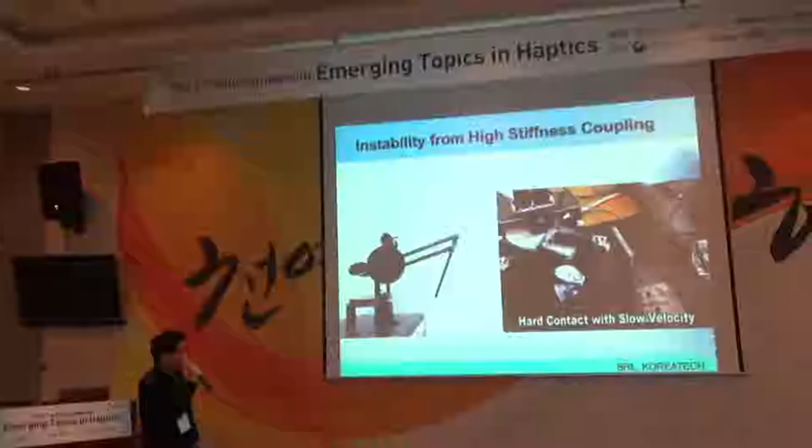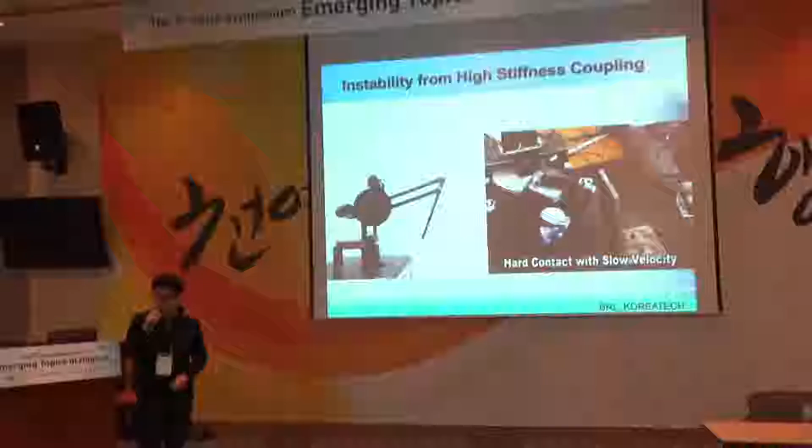So let me start with some of the control topics that I have been doing so far. At the early stage of telerobotics and control, especially from the robotics point of view, a lot of people were actually interested in control, especially stability.

So where does this instability come from? Actually, this instability problem comes from the high stiffness haptic coupling between master and virtual environment, and also master and slave. So typically, I was interested in these problems. Let me show you some video clips.

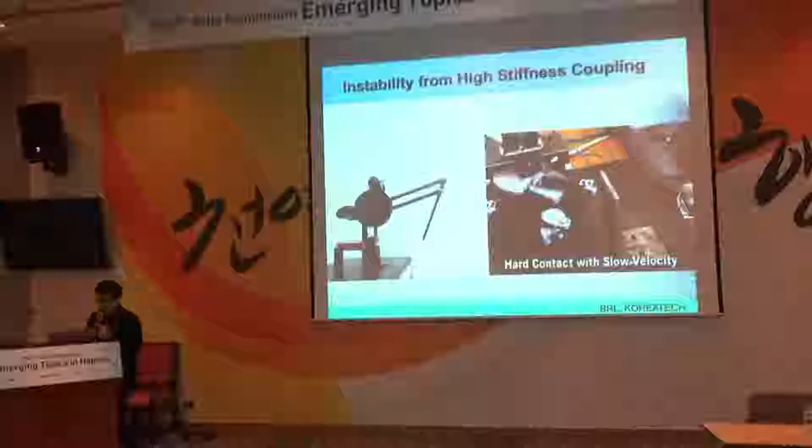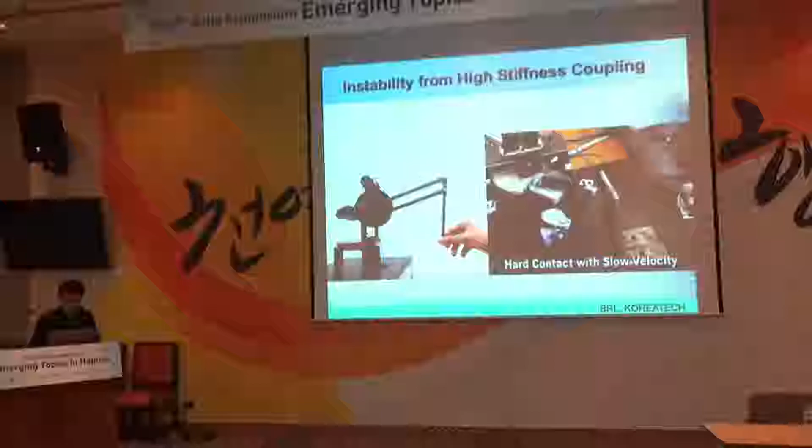Okay, now, whenever you increase the stiffness of the virtual environment, especially for phantom, if you increase the stiffness about 2 or 3 kilonewtons per meter, then you can hear such a strange sound. Is it familiar?

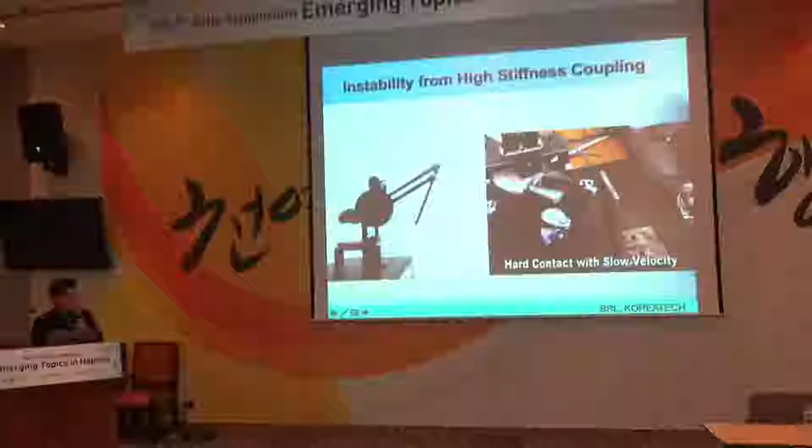And also, if you increase the coupling stiffness between master and slave, then even without time delay, the system easily goes unstable.

So at the beginning of the early stage of telerobotics and control, a lot of people were actually working to try to solve this problem, and I was one of them trying to solve this problem.

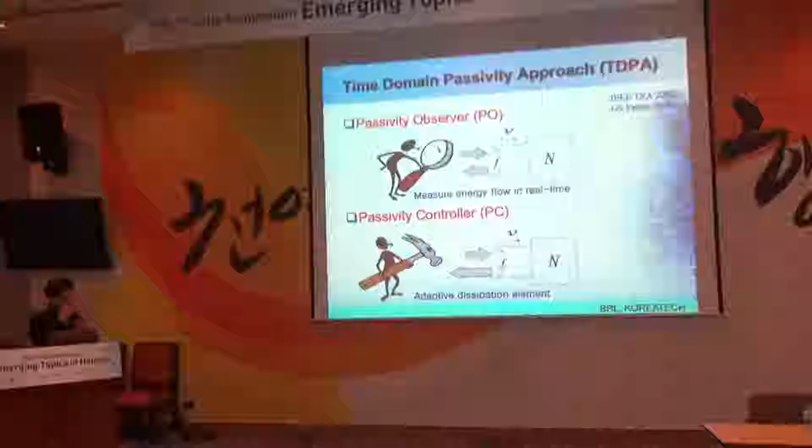One of my major scientific contributions in this area is proposing a new concept of control strategy, namely the time-domain passivity control approach. It has 2 components: the passivity observer, which monitors energy flow in real time, and the passivity controller, which dissipates the extra amount of energy produced from the system that could potentially make the system unstable.

So that was a very simple concept, but very effectively working, in the sense that it injects an adaptive amount of damping whenever necessary. This controller has been known as one of the least conservative controllers in this area.

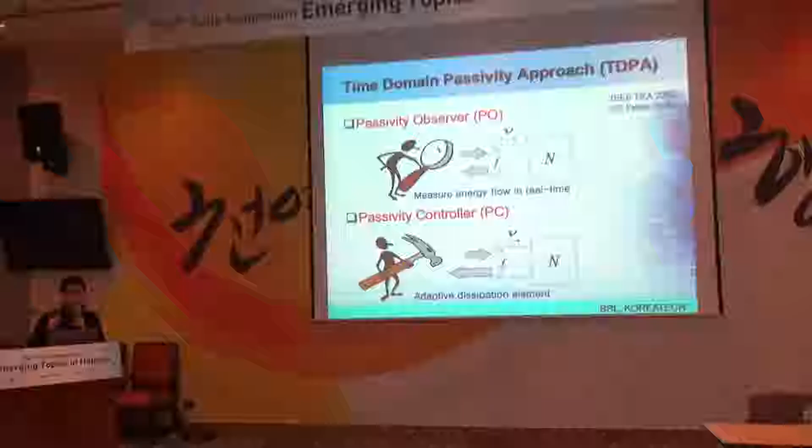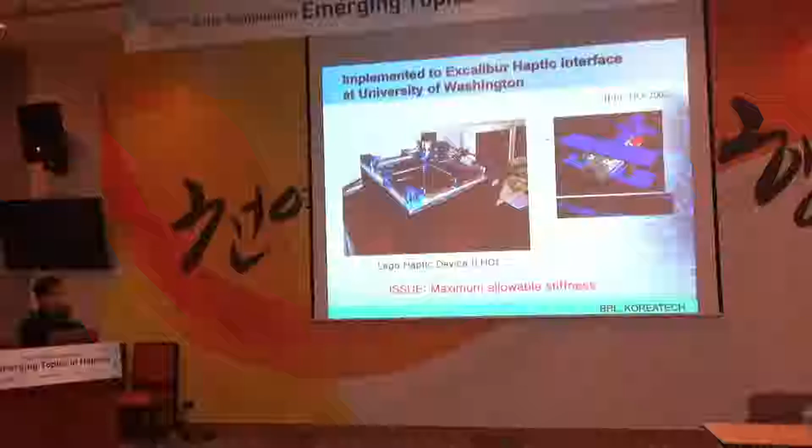And the first application of this idea was the Excalibur haptic interface at the University of Washington, because I invented this control idea together with Blake. This device was interacting with a virtual Lego airplane rendered inside the computer.

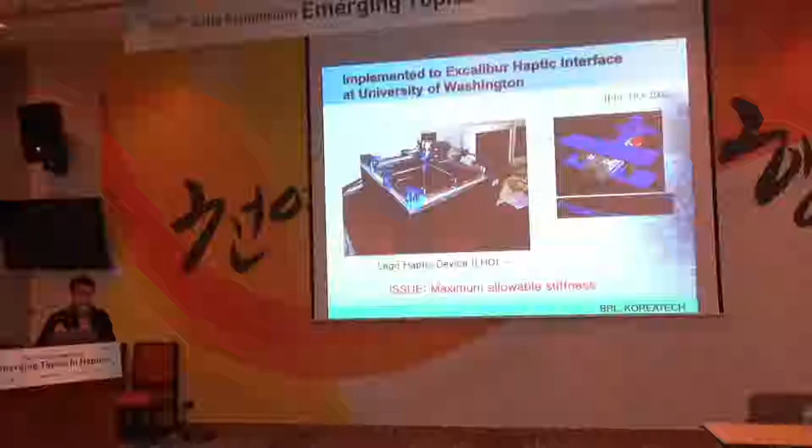And the issue was, what was the maximum allowable stiffness that you could display? If you imagine a Lego block, it's really stiff. But if you try to render this high stiffness with a phantom or any type of haptic display, you cannot actually increase the stiffness up to a certain level. So that was the question for us.

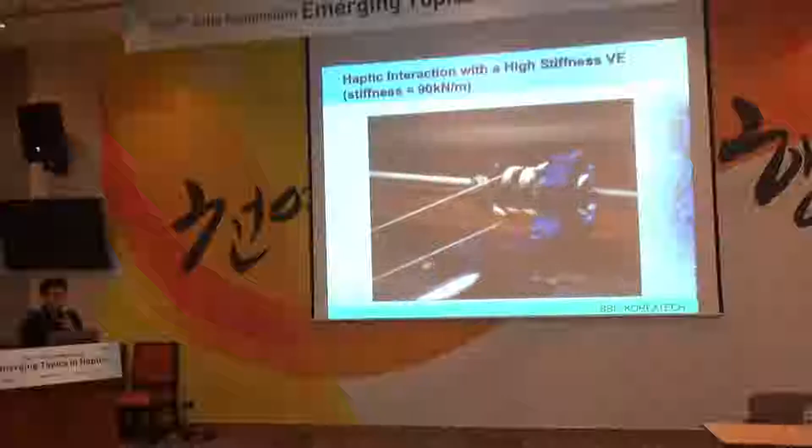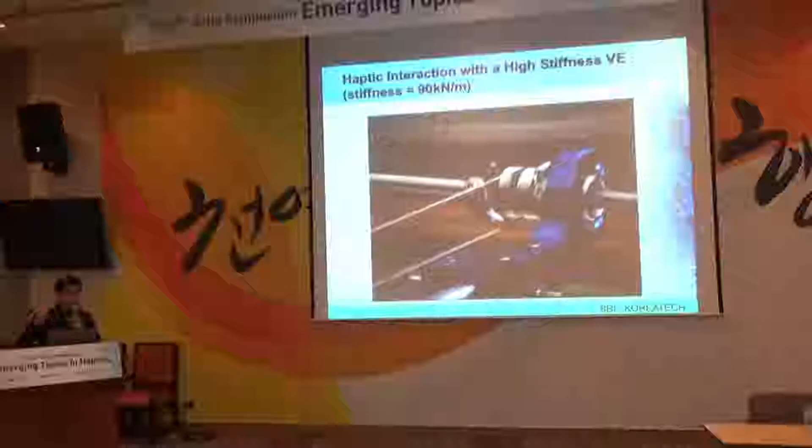One of my former PhD students, Rick Adams, proposed the virtual coupling idea, and he was able to stabilize the system up to 70 kilonewtons per meter, which is already quite high. But when I tried it, it didn't feel that stiff. So I increased the value up to 90, which felt much stiffer, but suddenly it went unstable.

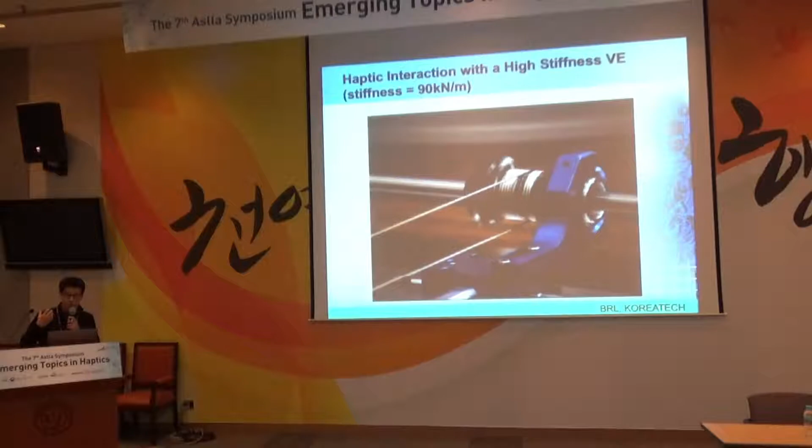After I implemented the passivity control approach—sorry, I don't have time to explain the concept in detail—it becomes stable, and we can still have high stiffness interaction.

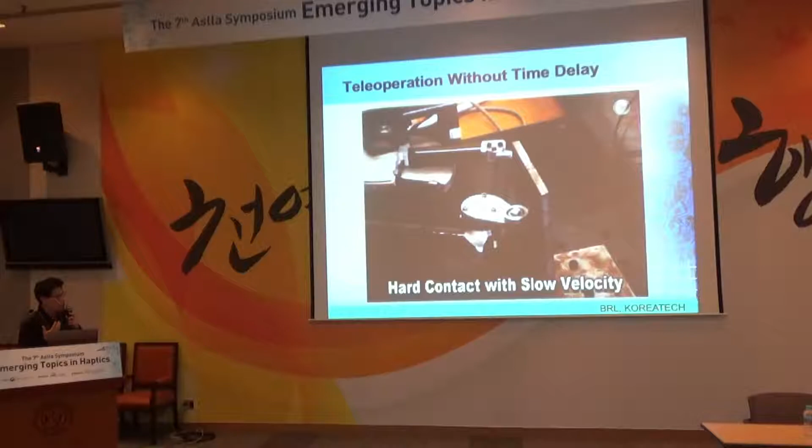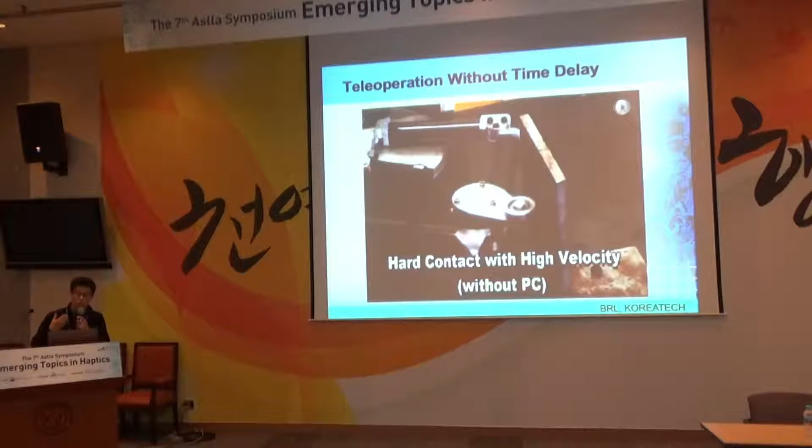This idea has been extended to teleoperation without communication time delay. When there is no time delay, if you approach the environment with slow velocity, there's no instability issue. But with high velocity, the system suddenly becomes unstable. After we implemented the time domain passivity approach, which we call TDPA, the system that went unstable, we were able to achieve stable contact.

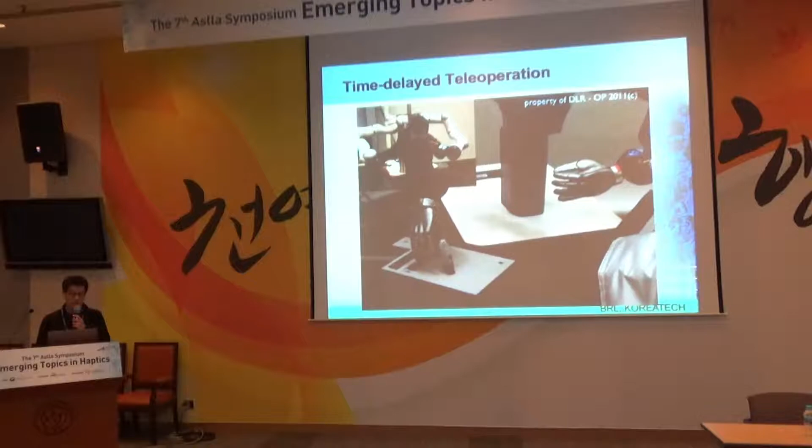Once communication time delay is introduced, the system gets even more complicated and harder to stabilize. Since the late 80s or early 90s, a lot of people have been working on stabilizing time-delayed teleoperation systems with haptic feedback. That was classically a very difficult issue.

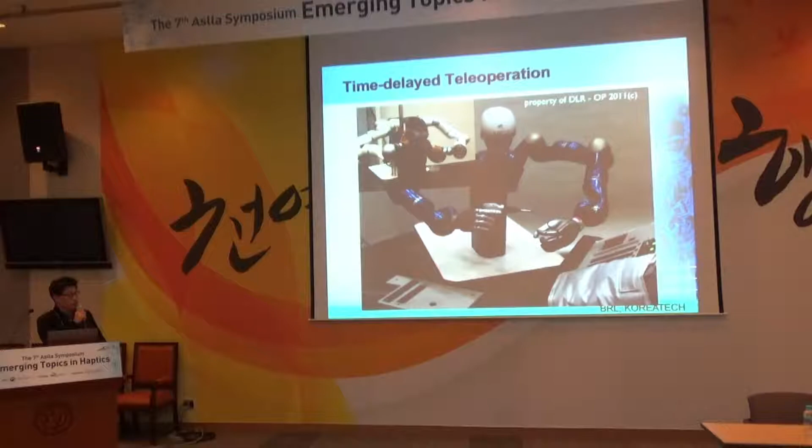I was working with a researcher at the German Aerospace Research Center, and we finally proposed one framework based on the time domain passivity approach. We were able to implement this idea into their space telerobotics system.

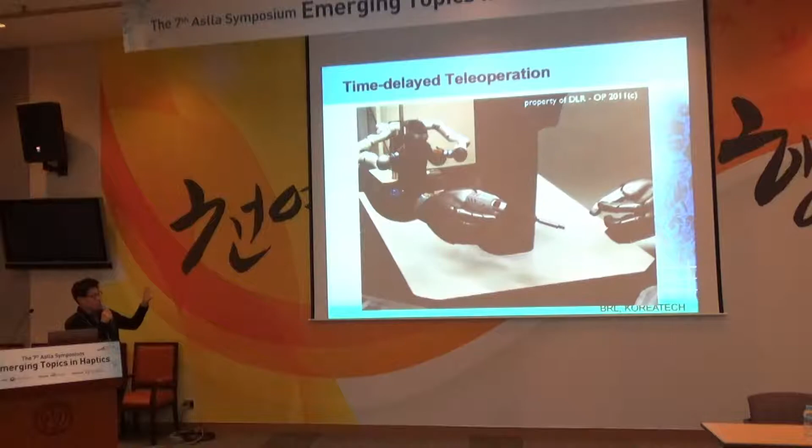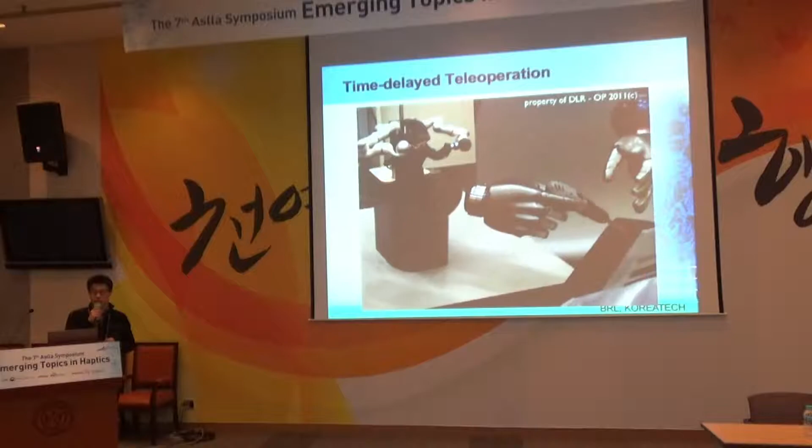This system was actually located in the same experimental laboratory, but the actual communication was done through satellite, so there's a 500 millisecond time delay back and forth. This is the task that an astronaut in the International Space Station has to do, so we basically demonstrated a dexterous and complicated enough task that astronauts need to perform there.

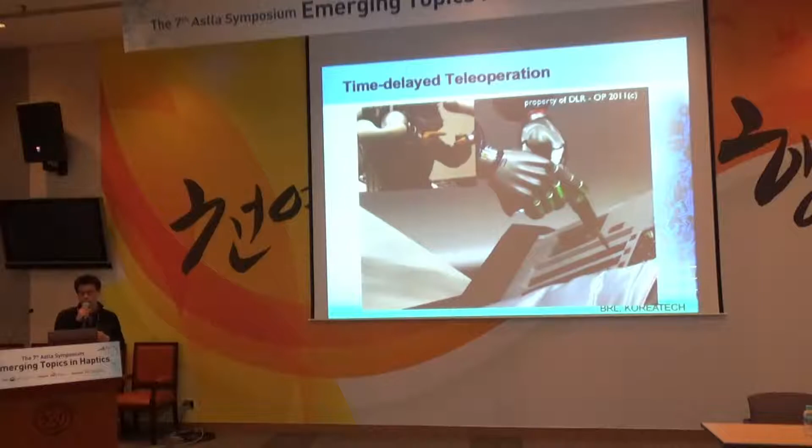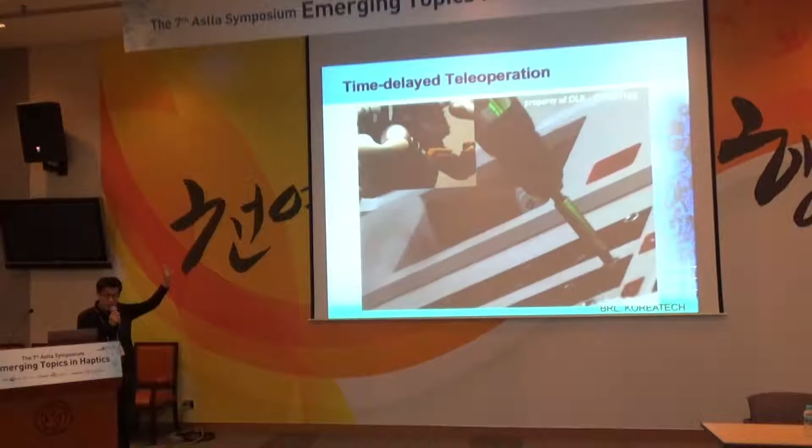This video clip shows some behind the story. The guy controlling this is Jordi Artigas, who developed this algorithm together with us. When he was approaching the bolt, he couldn't actually see it because the hand was too big and it was occluded, but he was able to manage the bolting job because he could feel it.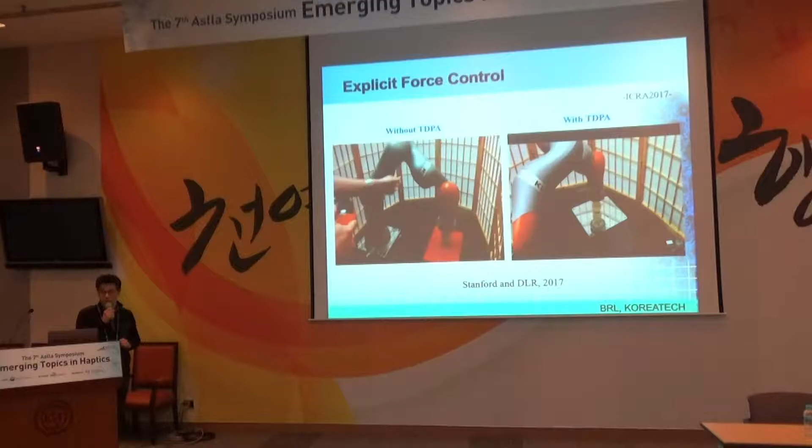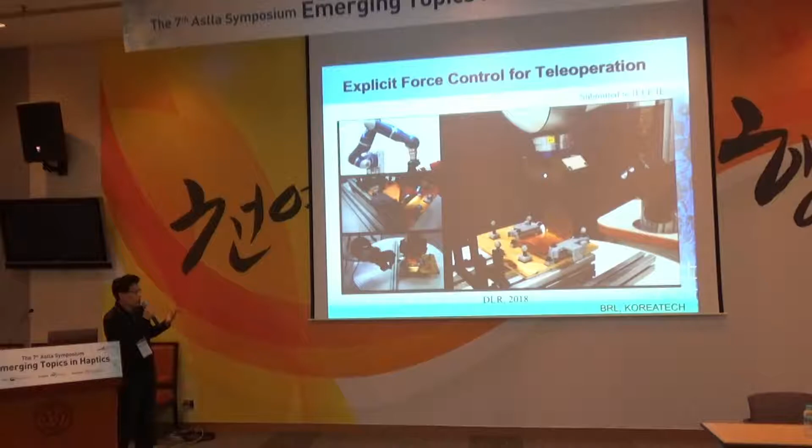Based on the same framework, we extended this idea to stabilize an explicit force controller of a robot manipulator. We combined this with explicit force control and time delay teleoperation to demonstrate a very precise chip insertion task. Thanks to high precision force and position tracking performance, we achieved 0.08 millimeter tolerance in chip insertion with time delay.

That was quite remarkable, and we recently submitted this idea to the IEEE Industrial Electronics Special Issue.

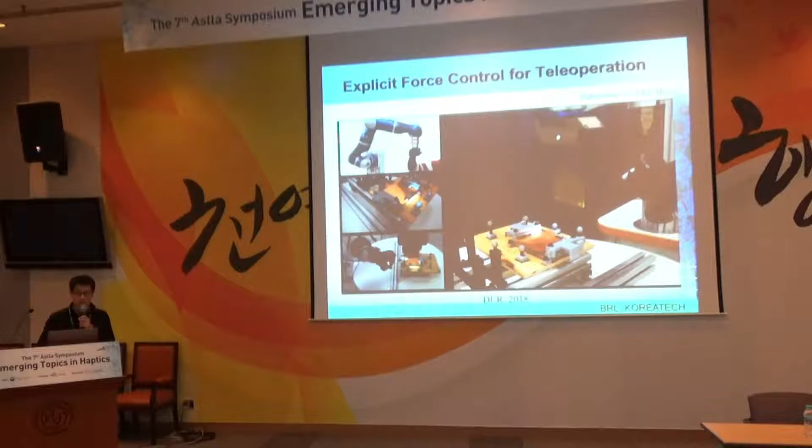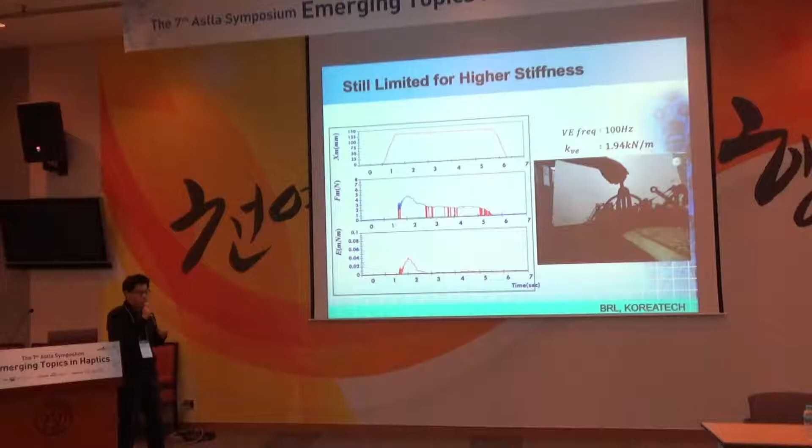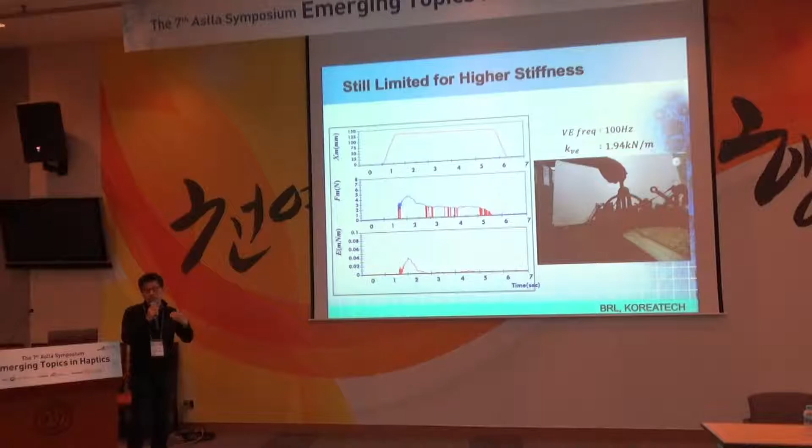Even though the time domain passivity approach works very well and shows a lot of possibility, it's still not enough—it's still limited in displaying higher stiffness. If you increase the stiffness even higher than a certain value, depending on the device, the system gets unstable. You cannot increase the stiffness beyond a certain value, and it starts to show noisy vibration over that value.

So we started to think, what is the issue? People in this area are still working on it, though not many—maybe me, Dongjun, and a few others. We started to think: how can we increase stiffness even further? What's the maximum stiffness, and where does the problem come from?

Then why is the system stable? Because there is damping. But if this energy gap area is bigger than the intrinsic damping, the system goes crazy. That's the reason.

And I propose, really—okay, it's broken. Let me start again.

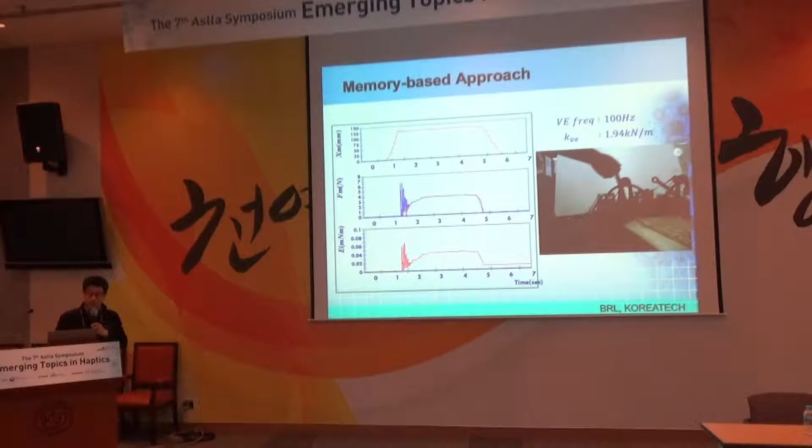This idea has been proved with an experimental setup, and you can see there's no jittering or unstable behavior. This is a very interesting plot.

One limitation of our technical approach is that we have to detect every single pulse of the encoder event in order to implement this. This isn't too difficult a limitation when we use FPGA. But still, many people want to use commercially available off-the-shelf haptic devices and still have high stiffness display. So we propose another idea, which is also very simple.

It's about the haptic interaction point and the virtual environment. If you penetrate, the stiffness that humans perceive is force divided by penetration depth. While the haptic interaction point is inside the environment, if you suddenly shift the wall position, the perceived stiffness suddenly increases while you are maintaining the original stiffness of the virtual environment. This is kind of a trick, but it actually increases the stiffness.

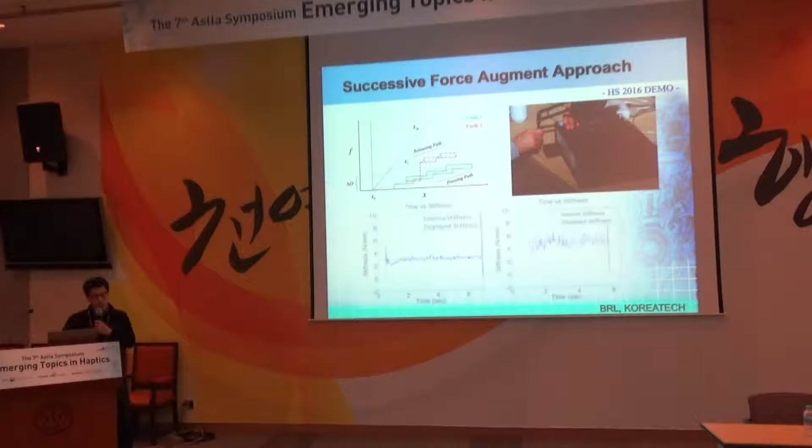This is equivalent to introducing a force feedforward offset, which is independent of stability. So we can increase the stiffness independent of stability. That was the trick. At the 2016 Haptics Symposium we demonstrated this demo, and at Eurohaptics 2017 as well, I believe. And I believe Karen tried that demo and asked what's the secret behind it.

Do you remember? Can you remind me, backing up, when do you make the transition on that? When you switch from X1 to X2, when they reverse direction? Right, so if you shift the original wall position, the haptic interaction point position also shifts up, to an equivalent position, right? That position reversal. Right. But when you calculate the perceived stiffness, you have to calculate from the original penetration position. So that's simple, easy.

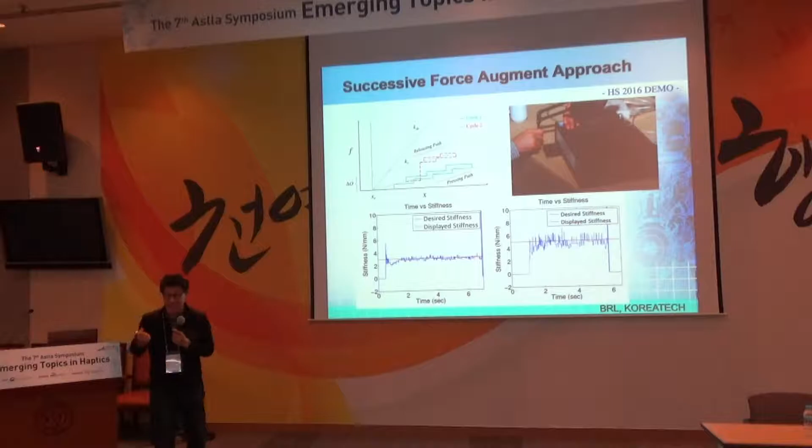Especially at Haptics Symposium 2016, we demonstrated this to Ken Salisbury, and you also tried that, right? Ken Salisbury came to our booth - he's the inventor of the Phantom. He tried it and knew that the Phantom cannot display such stiffness. There's a limitation. He looked back at the Phantom and said, okay, there's no mechanical stopper. That was a great moment.

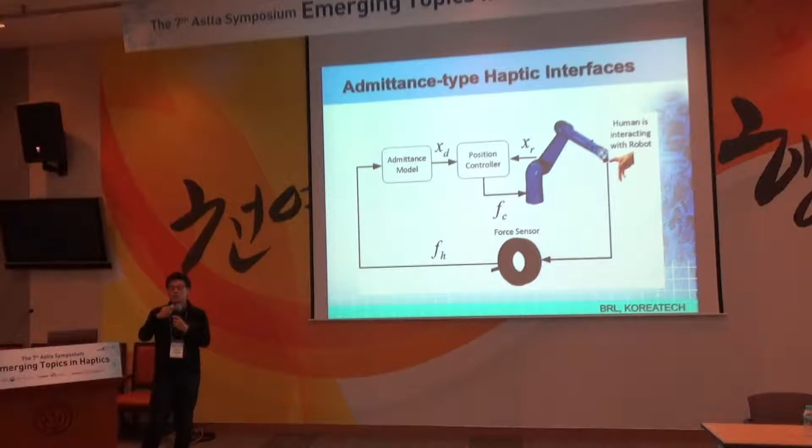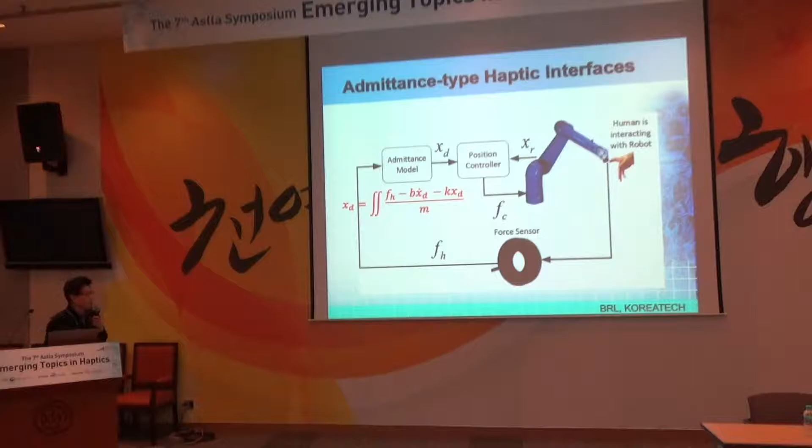This kind of stability problem exists not only in impedance type but also admittance type devices. There are only a few people working on admittance type haptic displays, but admittance type has a different problem. You can easily display high stiffness, but have a problem in low stiffness rendering, because it measures interaction force, integrates to render the virtual environment, calculates the desired position, and tracks this position. That's how an admittance type device works. As you can see in this integration scheme, you cannot actually make M zero, so there is a certain limitation.

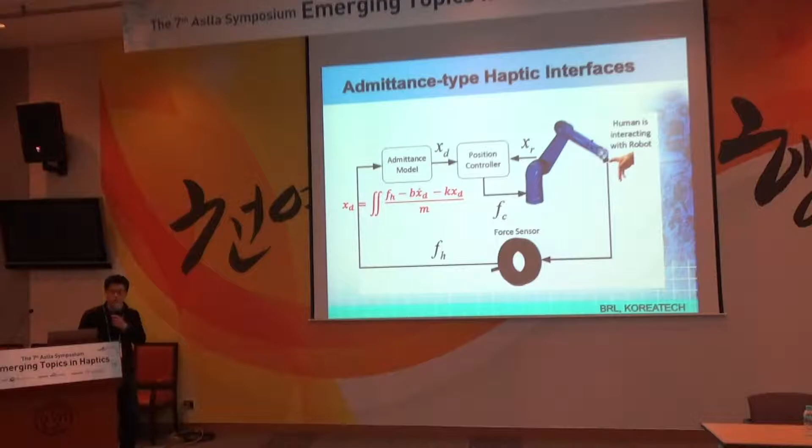Like in this video, if you set inertia to 0.1, it's stable, but it feels heavy - quite heavy. But if you lower it down 10 times, it feels softer, but it's already unstable. So there's a limitation to lowering down the inertia, especially... and at 1 gram...

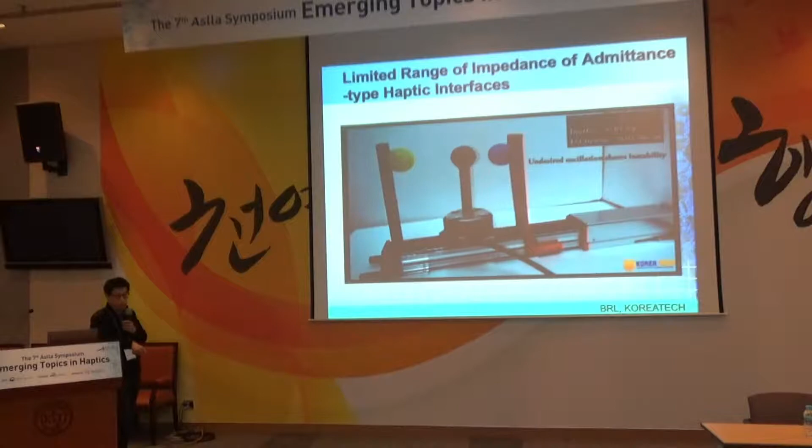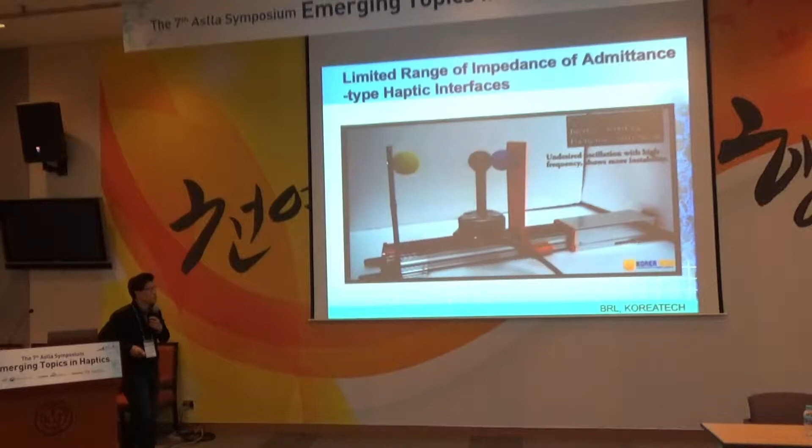It becomes crazy. But actually, humans also want to feel free space, not only constrained motion. You may think, okay, a human can stabilize this - if I strongly grab, then the human can stabilize it. But it's exactly the opposite: human arm stiffness makes it even worse. That's the property of admittance type devices that we need to fix.

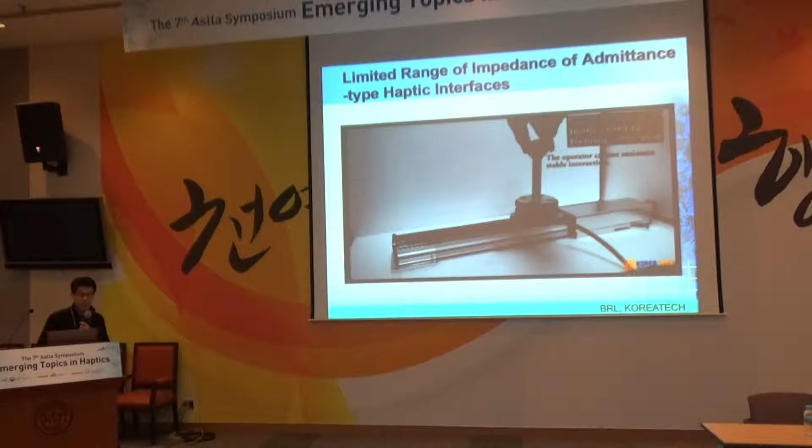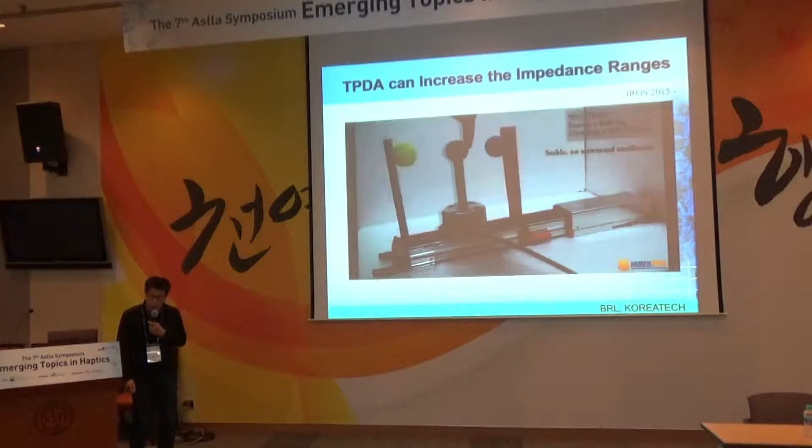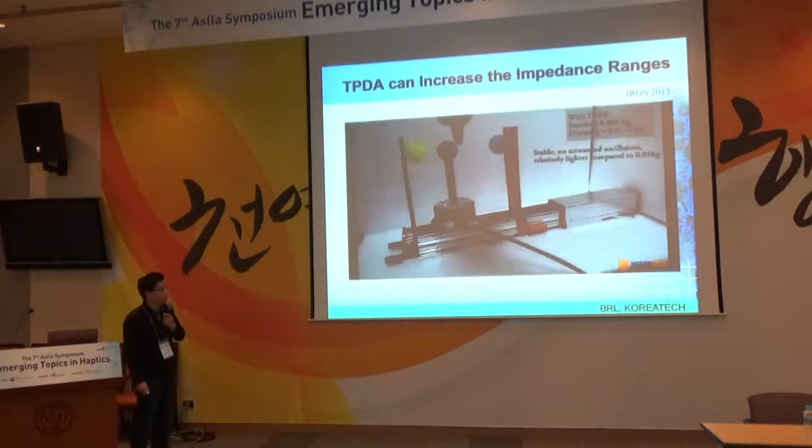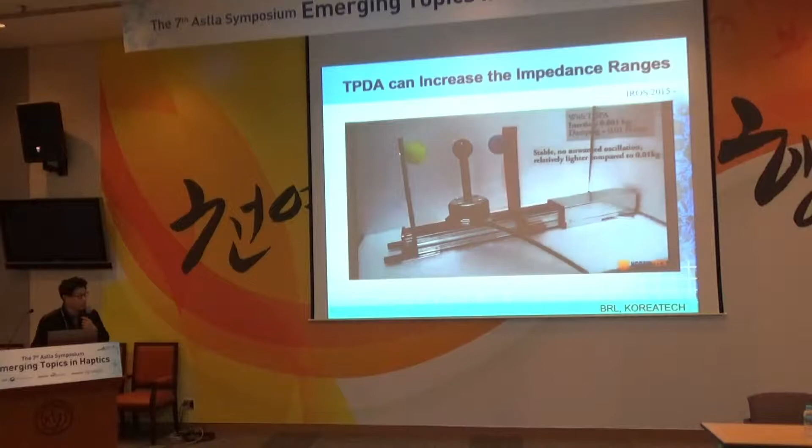So based on the same framework, we propose a stability control idea for admittance type devices. At 0.01 kilogram it's stable and feels much lighter, and at 1 gram it's stable and even feels very light inertia. That was one extension of this line of research, and there is actually more, but I don't have enough time to introduce it. And human arm stiffness also doesn't break the stability.

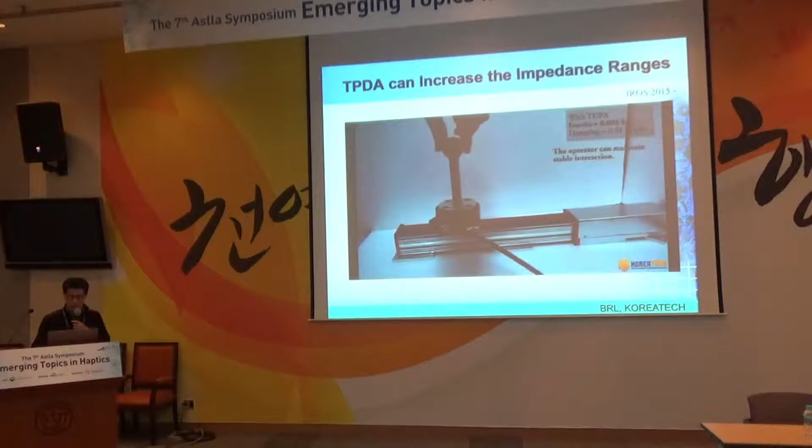Got it. Okay, then let me talk about what I'm doing recently.

So far, most telerobotics controllers were limited to direct control, not even bilateral, but unilateral. Surgical robots and commercially available telerobotic systems, particularly in plant and underwater applications, everything is unilateral, not even bilateral, with no haptic feedback at all. But thanks to active research in our haptic community, I think we're very close to introducing bilateral control to telerobotic systems nowadays.

What's next? As the levels of autonomy increase, we want to relieve human operators' workload. Thanks to recent developments in deep learning, planning, and visual perception, a lot of people have started doing this kind of research.

We call it shared teleoperation, and in the extreme case, a human can just press a button, click a point, and the robot does the rest of the job itself. Nowadays in robotics and also in haptics, people have started working on shared teleoperation and supervised control. The concept was already out there for decades, but we didn't have enough tools to realize this idea. Now we have the tools and ideas to realize it, so people are working on this. I'm also one of the researchers working in this area, but more from the human side.

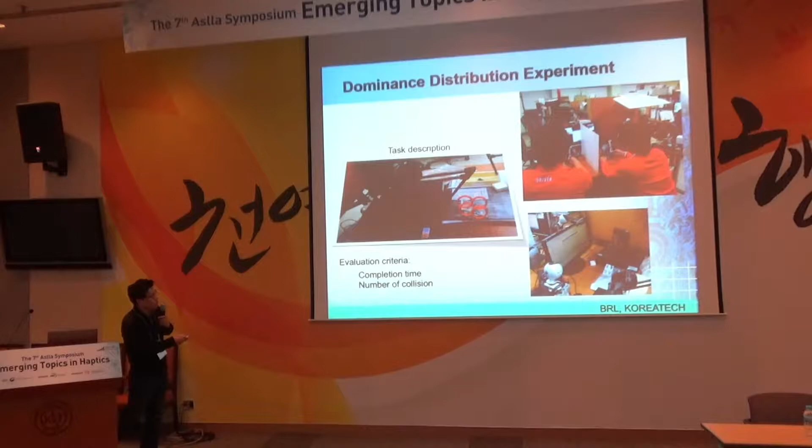That's the idea, and we tested and evaluated the performance doing a peg-in-hole test with phantom collaboration. We measured completion time and number of collisions, and not surprisingly, dual operator shows better performance in terms of number of collisions.

But one interesting thing is that the operator doesn't want to be intervened. Once an operator controls the x-axis, he wants to fully control it without any intervention from the other operator, so the fully decoupled case shows the best performance. Another interesting thing is, even though a human wants to fully control one axis, he still wants kinesthetic coupling with the other operator, meaning he wants to know what the other operator is currently doing. So when we introduced kinesthetic coupling between two operators, it showed the best performance. Interesting to me.

But this field of view-based authority decomposition is not always straightforward because the camera view is always changing and it's not always orthogonal to the base coordinate of the manipulator. But when a human looks at this, they can clearly tell, okay, I can control this axis better than the other operator, and I can control this axis better than the other operator. So in the previous experiment, we decoupled this offline, in advance.

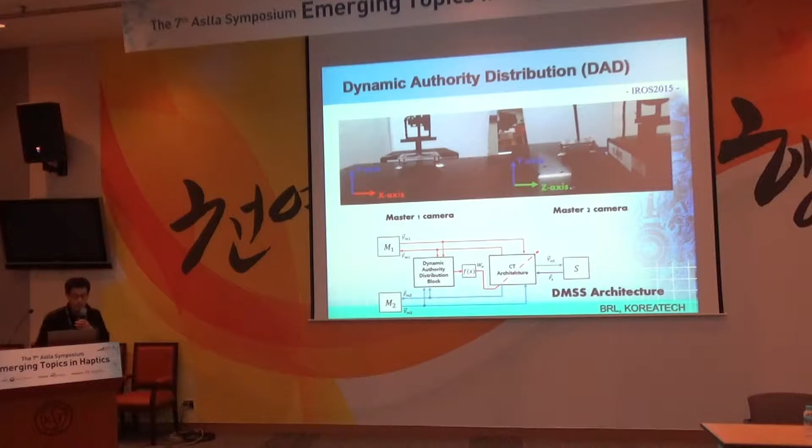But now we try to decouple this and determine the dominance in real time. At the beginning, we distribute dominance equally, 0.5, 0.5. The two operators start teleoperating and feeling each other's intention. One operator tries to dominate one axis, the other understands the intention and yields. We check energy flow, and this dominance converges automatically. That's the idea behind dynamic authority distribution, and here are several experiments with different camera angles.

Let's skip this. Okay, the next topic I'm working on is together with TUM.

Even though multi-user shared teleoperation is a good approach to relieve human operators' workload, it's not a very cost-effective solution, because single manipulator teleoperation with multiple operators is too expensive. What we've done is ask, what if we train the robot through teleoperation? There's a lot of research on learning from demonstration by kinesthetic teaching, meaning directly grabbing a manipulator and teaching it. But in many cases, teleoperation is necessary because a human cannot be beside the robot. In this case, we need to teach the robot through teleoperation.

But the problem with teleoperation is that the demonstration data, if you compare it, is not consistent and sometimes incomplete. So we were not able to use the previous conventional learning-from-demonstration scheme. We proposed a new idea and were able to demonstrate it. This is how we demonstrate this, the demonstration procedure through teleoperation.

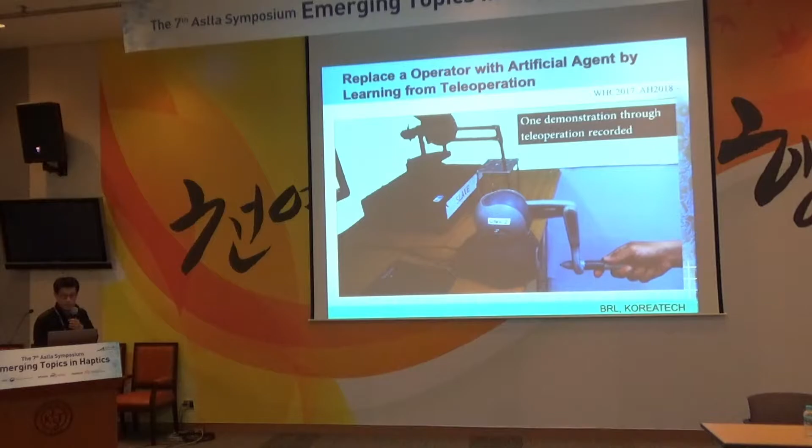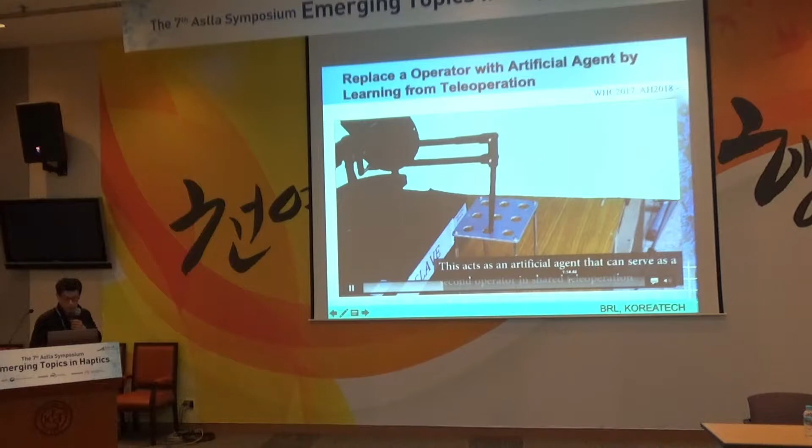In some cases, if a human needs to intervene and modify the trajectory, then based on this dynamic authority distribution method, the artificial agent and human operator collaboratively work together.

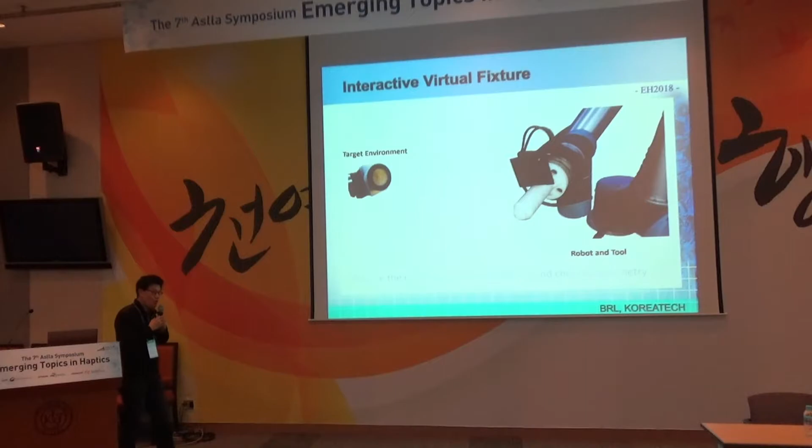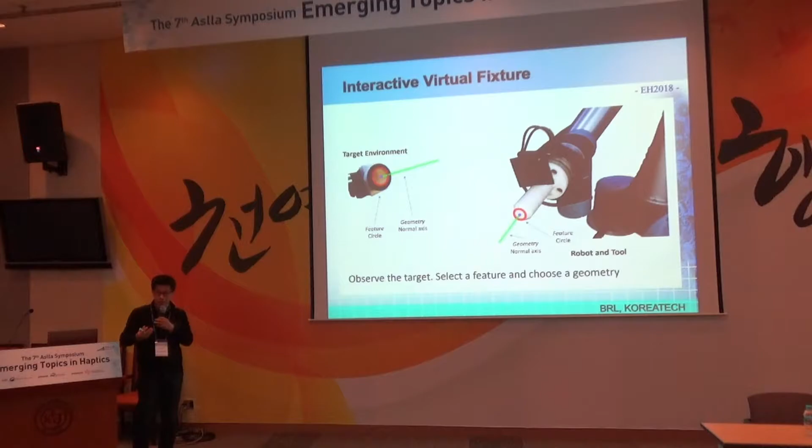Back to haptics. One of the key components of haptics for teleoperation is the virtual fixture, which is a kind of haptic guidance for helping the human operator prevent entering a forbidden region and guiding them to the target point.

There is a lot of research about virtual fixtures and how effective they are, but not many researchers talk about how to generate virtual fixtures in real time in an unstructured environment. When a robot is dispatched to an unstructured environment, there is no information about the environment and how to generate the virtual fixture.

So we provide an interactive way of generating a virtual fixture. Humans have experience - when a human looks at the environment, he knows what kind of virtual fixture he needs. Thanks to current developments in vision recognition and perception algorithms, we can detect features and geometrical objects in real time in the vision background, and the human can simply click several times and we automatically generate the virtual fixture.

We can use this for teleoperation, and there was a peg-in-hole task based on this real-time virtual fixture generation method.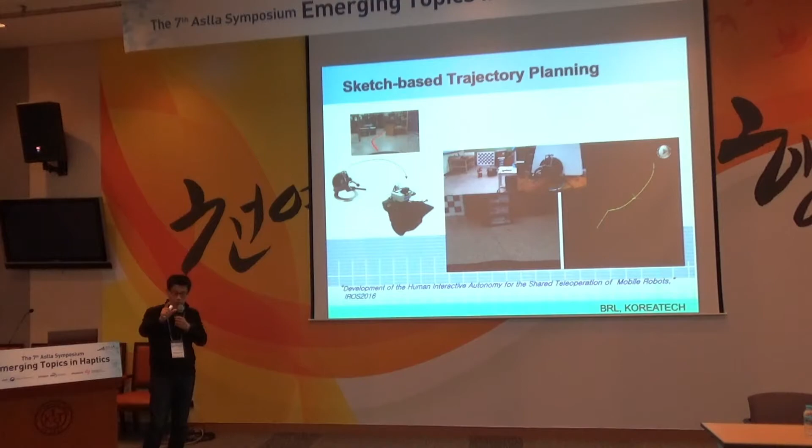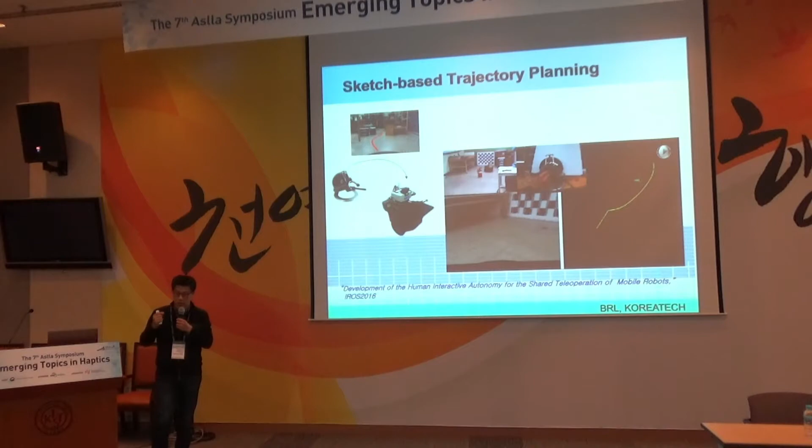If we look at the virtual remote environment from a far distance, sometimes it's clearer to see and understand the desired behavior of the manipulator. So what we propose is: what if a human sketches on top of the image and uses this as a reference trajectory?

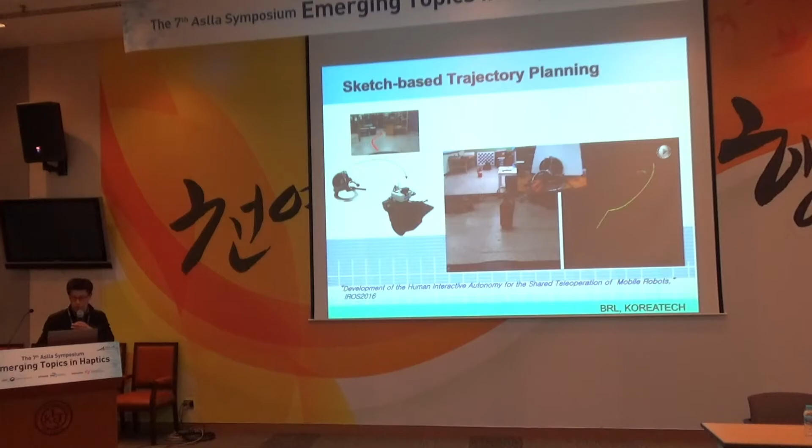The mobile robot plans this trajectory and moves towards the object, and in the meantime the human can also intervene and modify that trajectory. This idea has been extended to multi-DOF robot manipulators, and also to avoid obstacles by combining this with an elastic planner.

So far I've only introduced what I have done and what I'm recently doing, and I'd like to briefly comment on what will be next in telerobotics. It's a really difficult question.

As you all know, telerobotics came first and then haptics - actually the first haptic came from telerobotics. Ray Goertz's combination of that was the first haptics.

Since then, it's been already 70 years, and a lot of research has been done. Only several, not many, years after Ray Goertz proposed his first telerobotic system, there were already many complicated and dexterous telerobotic systems developed. Many people already tried most of the things we have done so far.

A lot of things were tried, and people initially investigated the performance and possibility of telerobotic systems. But they faced a lot of problems and issues - it was not easy, not a simple single manipulator control problem. So, in my understanding, and this is only my perspective, people tried to tackle this problem separately.